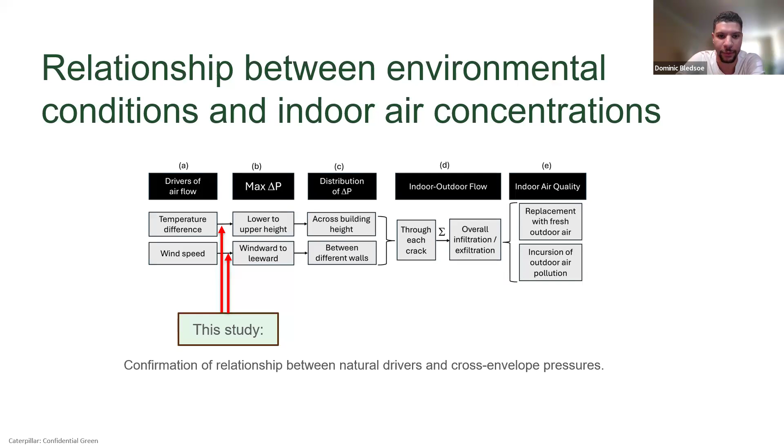So two of the foundational models this is born out of are the Lawrence Berkeley National Lab model and the Alberta infiltration model. Both have been around for a while, and they've both had a pretty significant impact on the standards put forth by ASHRAE, particularly the ventilation standards.

Basically, these models are used to understand how much air is moving in and out of the home. Based on that, if it's too low, the standard dictates that more ventilation, in terms of mechanical ventilation, needs to be installed. So it's a pretty foundational study, or two models, I should say.

Both of them also use leakage characteristics and pressures. But interestingly enough, the relationship between the weather conditions and the pressures doesn't have a ton of validation, especially in the field. There are some assumptions made based on the relationships between weather conditions at an airport, and those are then corrected to try and represent what's going on at the home.

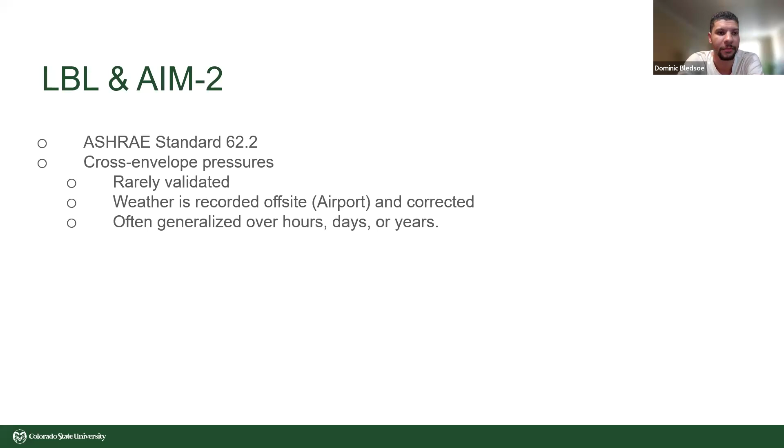So the objective of this was twofold. One is to try to validate or compare the theoretical relationships between weather and pressure. And secondly, to shrink the time scale that we're measuring at and get a better understanding of how these change with time.

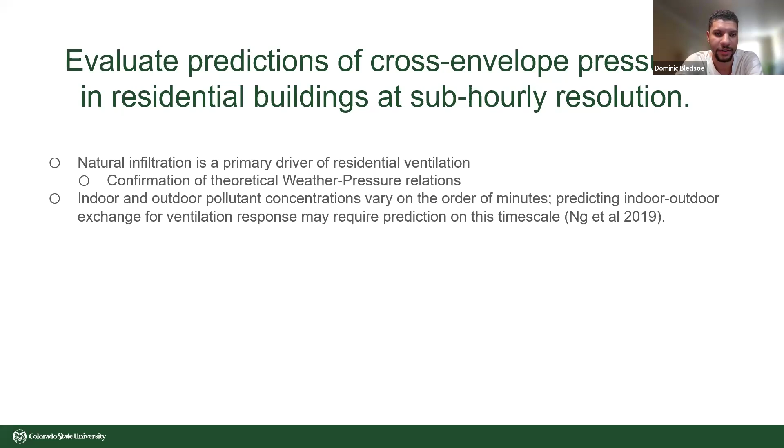So we did measurements in 8 homes, the longest of which we did for just under a year. We had various different sizes, heights, and characteristics within the home. We had some that had 2 exterior walls, some with 3 exterior walls. We wanted to get a general idea of what's going on in single family residences.

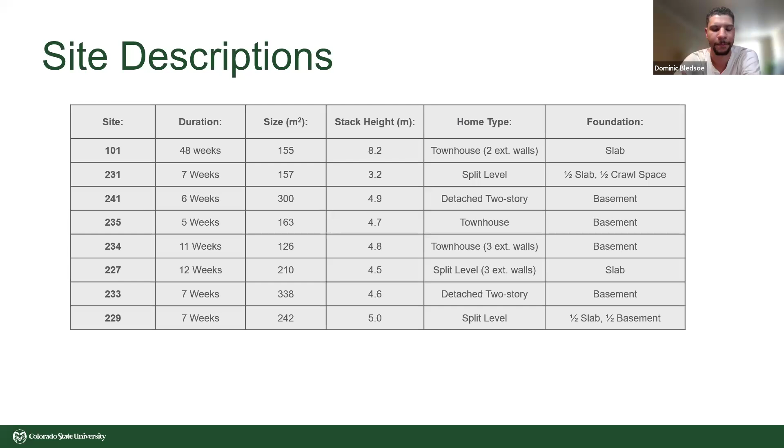So the measurements that we took: we had temperature measurements inside and out. We also had wind pressure or wind speed measurements and direction, as well as differential pressure measurements at the extremities of the home. So we had 2 at the highest point, around the roof line, and 1 at the lowest point above grade. We'll get a better understanding of why those were taken in a little bit.

But the main reason for choosing these instruments in particular was trying to get the time step we were looking at as small as possible, and trying to get a really granular view of what's going on on a minute-to-minute basis.

So these are some of the calculations that we did to understand a little bit more about the pressures that I touched on previously. This in particular had to do with the stack effect.

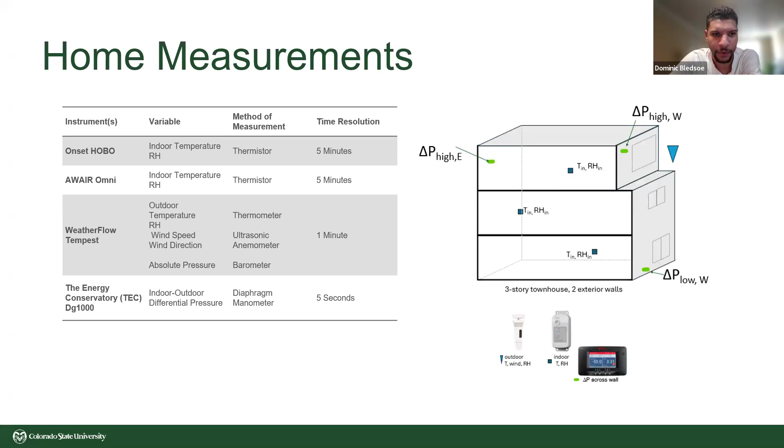We had observed and predicted stack pressure measurements. For the predicted pressures, going back to the house diagram, we have temperature measurements at each floor of the home. For each floor, based on the temperature and relative humidity, we were getting a density value, and from that we were able to calculate the floor pressure, stack pressure. By combining all of the floors together, we were able to get a representation of what that stack would be. In terms of the observed stack, we did measurements at the extremities of the home.

Hey, Tom, I'm not seeing your screen anymore. Are other people seeing it? Am I missing something? I can still see it. Okay, I don't know what's going on. I'll try to figure out what's going on with my computer. Yeah, I can see it too. Okay, fine. I'll be quiet.

So the observed pressures that we took were differential pressures at the extremities. Taking this diagram, when we have our differential pressures at the ceiling, we'll have, in reference to indoors, a positive pressure because the pressure is higher indoors. So that indoors minus outdoors will be a positive pressure.

But due to the fact that the gradient of pressure within the home is less than outdoors, we actually see at the floor a lower pressure than outdoors. In between there, we have some point, not always necessarily known, that is a neutral point. The difference, since the floor is negative, is kind of the summation of it. The summation of these pressures gives the net infiltration and exfiltration force, which is important for understanding how air is going to behave within the home.

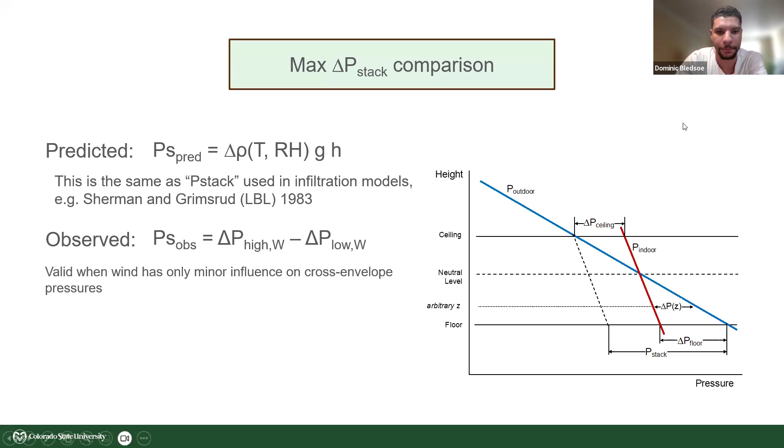The second comparison we did was predicted and observed wind pressures. To start off with the predicted, we began with just a simple dynamic pressure from our Bernoulli's equation, with the wind speed squared, rho, 1/2 rho v squared.

To try and make this a little bit more interpretable and get an understanding of the directionality of the wind, we also determined a coefficient in relation to wind direction. We broke the wind direction into 30-degree bins, and for each pressure tap that we measured at, we took a coefficient to try and understand the directional nature of the wind.

In terms of the observed pressures, we took the two highest taps because they were within a few inches vertically, and we were able to pretty successfully negate the effective stack pressures. So we wanted to see, given a wind, what is the net pressure, both negative and positive, on the home.

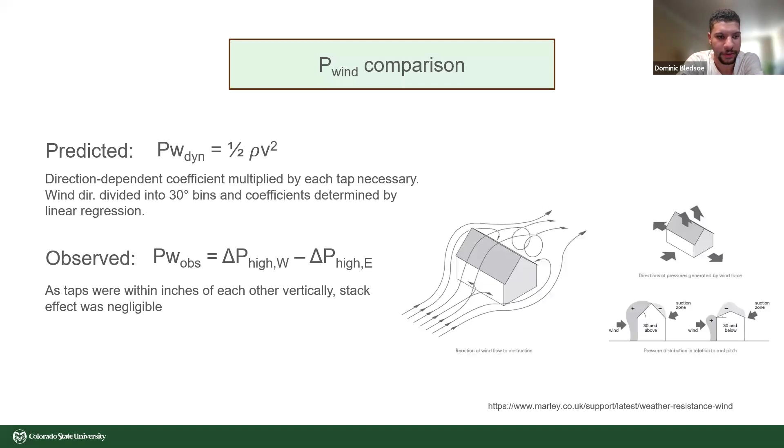And finally, the last thing we did, because the foundational models that we were looking at use wind speed correction factors for trying to understand what was going on at the site, we wanted to see, in our own example, between the sites that we measured and the local Northern Colorado Regional Airport down around Loveland, how close this correction factor could get us to what was being experienced at the site.

So what the correction factor basically does is two things. One is to try and correct for any height difference between the measurements. So we have the height of the ceiling or roof line of the house, and then we divide that by the height of the airport measurement, which I think the universal standard is 10 meters. Depending on what these next set of coefficients are, it can kind of cancel itself out.

But the second thing it is correcting for is the type of terrain that's being measured. It's a little arbitrary, but basically you try and decide which class each site, or the airport and the site, are at and make this calculation that way.

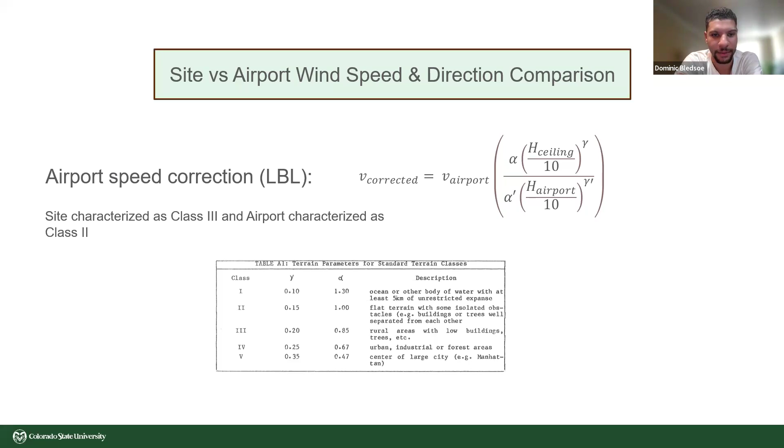So starting off with what we saw on the stack, we ended up seeing really great agreement when we were looking at low wind and heating conditions. Heating conditions, for those who don't know, is basically when the temperature indoors is greater than or equal to that of outdoors. Under these two conditions, we saw really great agreement.

I believe it was even without the heating factor, we saw generally errors around just above 10% of the total stack pressure in air. So really great agreement here.

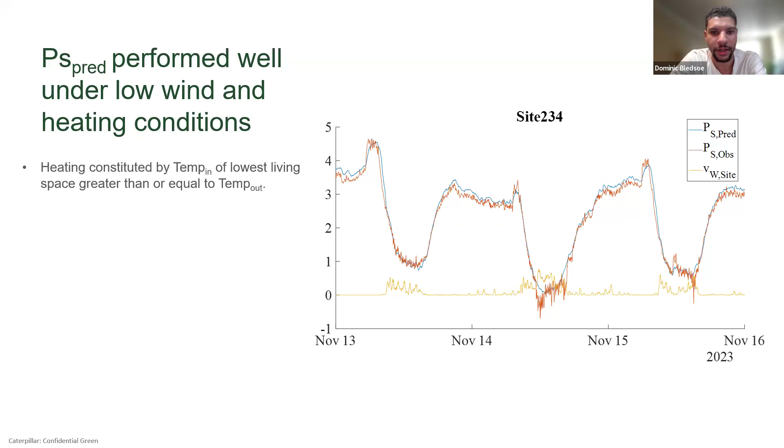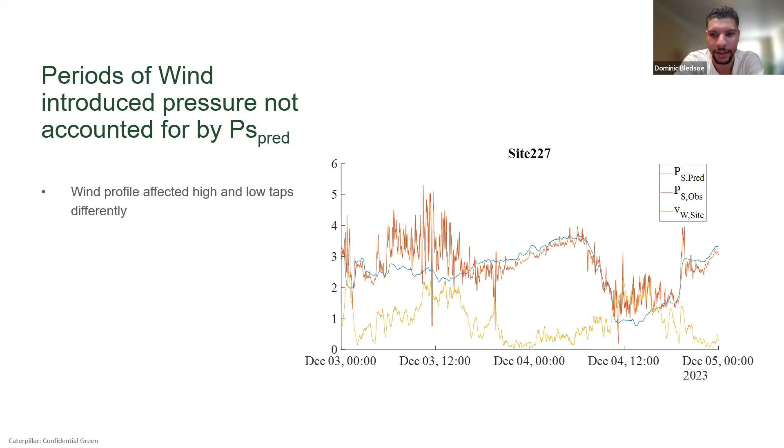Two conditions where we didn't see great agreement: when there was prevalence of wind, most likely because the incidence of wind didn't affect both the low and high tap equally. Wind is slower due to friction and obstacles lower to the ground, so it'll more often have a higher wind speed reported and higher pressurization on the top tap than the lower tap. This introduces a piece of pressure that can't be fully explained by just theoretical stack pressure. The second condition where we saw deviation was during cooling conditions.

This is opposite of heating - when indoors is cooler than outdoors, typically during summer if you're running AC or otherwise keeping your home cooler. We saw as soon as we crossed zero, some deviation from what would be expected based just on stack. We don't have a great idea what this could be due to. We corrected for stratification as much as we could given the temperature measurements at each floor, and as you can see in this figure, wind doesn't seem to be the main factor. This definitely needs more looking at, more measurements.

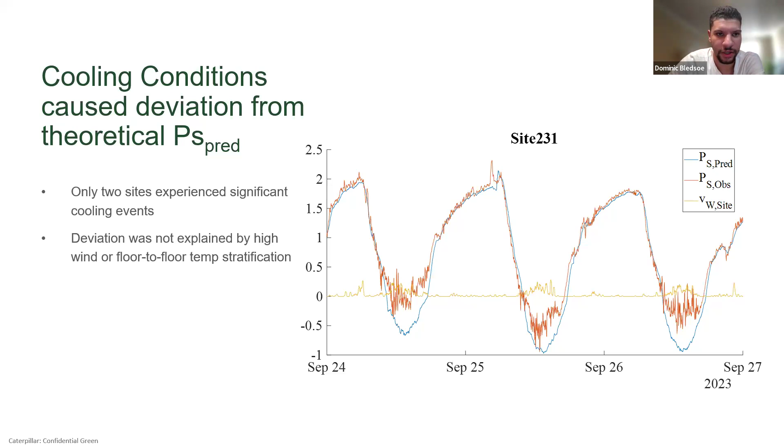So now moving on to the actual numbers. This is a lot, but basically for every site we sketched out the dates we observed over.

For the total stack pressure, I initially set it as average stack pressure, but especially for site 101, since we were looking at over a year, just taking an average of the stack doesn't give as nuanced a picture. So we took the 10th and 90th percentile of the stack pressure to get an idea of what's happening when we're getting down towards cooling, and what's the upper bounds of the most potent stack pressures.

In terms of statistics, we started with a mean absolute error calculation, which takes for each point the absolute difference between observed and predicted stack pressures. We did that for three conditions: first for all observations, second for just the low wind observations, and next to those values is the percent of observations that were low wind. Finally, both low wind and heating.

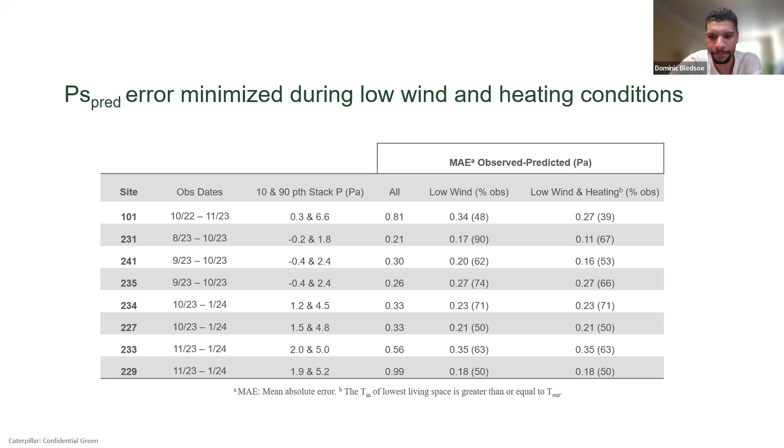So I'll move into wind predictions now. In terms of predicted and observed wind pressures, we saw not as good predictions as we did in stack, mostly due to the noisiness of the measurements, but also in terms of the magnitude of these predictions - they seemed to be under-predictive when taking our dynamic wind pressures.

We also saw at times, in multiple sites, a maintained pressurization during wind events, even though at times the wind was dropping to 0. Looking in particular just before midnight on November 24th, we see a maintained pressurization even though the wind speed seems to be dropping to 0, so our contribution of wind would be assumed to be 0.

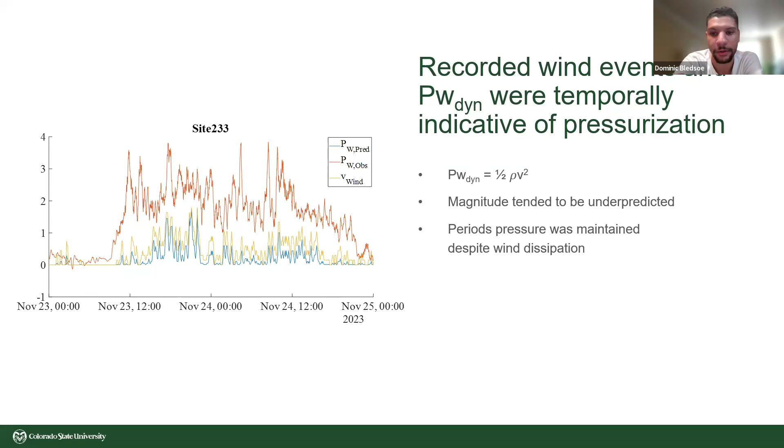In terms of trying to account for the directionality of wind, we were taking each tap and dividing the directionality into 30-degree bins, which we see on the wind direction column. For that, we took a linear regression between the pressures and the predicted one-half rho v squared estimates.

So this was kind of an extreme example. There was a table for every one of the sites, but this showed 2 of the unexpected characteristics we saw in quite a few of the other sites. The first being that even across various wind directions, we didn't see a very consistent crossover between signs, which we would expect.

If we have a direction that's directly facing the tap, we would expect that tap to be pressurized and therefore positive. But conversely, if it was on the opposite side of the building, we would expect a negative in this case. So that was one of the things that was a little interesting about these points.

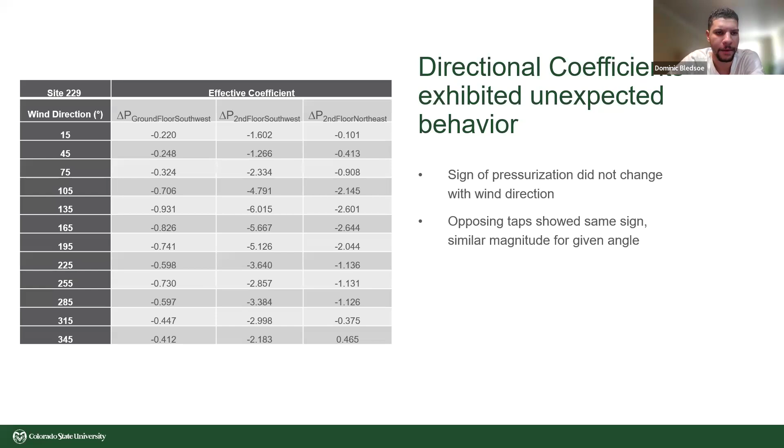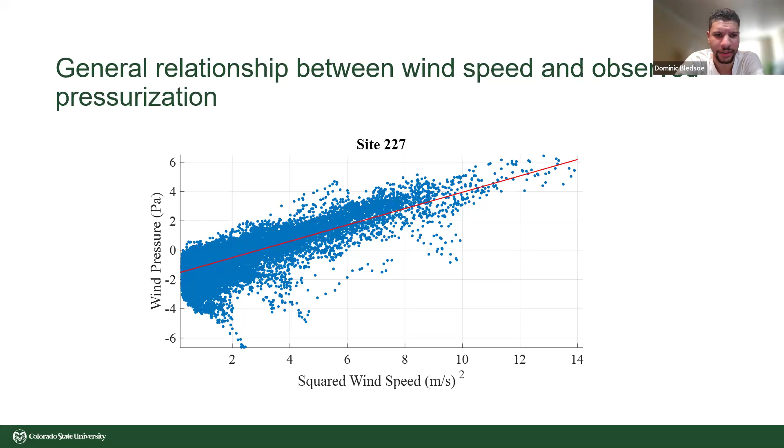So to try and get a general relationship between wind speed and observed pressurization, instead of trying to do point predictions, which because of the noisiness and inconsistent coefficients, we decided to just look at, for a given wind speed or wind speed squared, can we get an idea of what that pressurization would look like. This was an example of a good one. I think the R squared of this one was around 0.6.

It wasn't necessarily good for all of them, and I'll show an example. For some of them, especially in the sites where we didn't see a ton of high wind observations, the corresponding pressure to wind speed didn't seem to have a very linear relationship. We had some, particularly 229 and 227, that showed a decent linear relationship, but for the vast majority of the other ones, it didn't seem to really correlate.

Now I want to look at the relationship between site weather conditions and airport weather conditions. Like we said before, a lot of the preeminent models use corrections for airport wind speed. So we wanted to see how well airport wind speed represents conditions that we're seeing at the site.

The first thing we notice right off the bat is the granularity of the data is a lot different. Airports generally measure around hourly, once an hour measurements, which is very different from the 1 or 5 minute measurements that we were taking at our site.

Secondly, the magnitude is pretty significantly different, especially at the highest peaks of wind events. We're seeing somewhere around 5 times greater wind speeds, likely due mostly to the difference in height. But we'll touch on that correction and see if it makes a difference in a second.

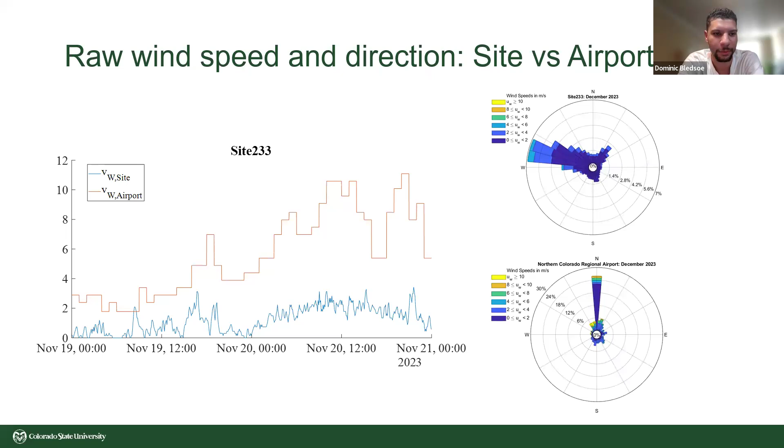Part of this is, when looking at those correction factors, the ability of the correction factor to do its job really depends on the person choosing the right classification for what each site is. There are 5 classifications, ranging from open ocean with no obstacles within 5 kilometers or 3 miles or so, to classification 5, like the middle of Manhattan or a very urban area with lots of skyscrapers and obstacles. I think part of what this shows is, one, it doesn't do an amazing job in and of itself, and secondly, the arbitrariness of deciding those classifications makes it not necessarily ideal for making assumptions about the conditions on site.

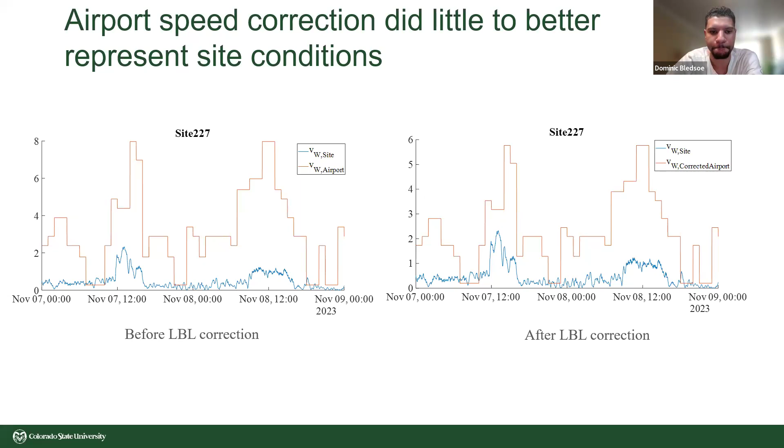So kind of to clean up here, we saw within stack pressure excellent agreement, particularly under low wind and heating conditions. For both low wind and heating, we saw around 10% error or less for most sites.

In terms of wind events, one of the things we are able to say is that when we were recording wind signals, it was an excellent indication that pressurization was going to be happening on the house. In terms of the actual relationship between pressures and wind speed, we had mixed results in the scatter plots we talked about earlier. And in terms of point predictions, just because of noise and coefficients that didn't necessarily line up with expectations, they didn't seem reliable to make point by point predictions and MAE values like we did with stack.

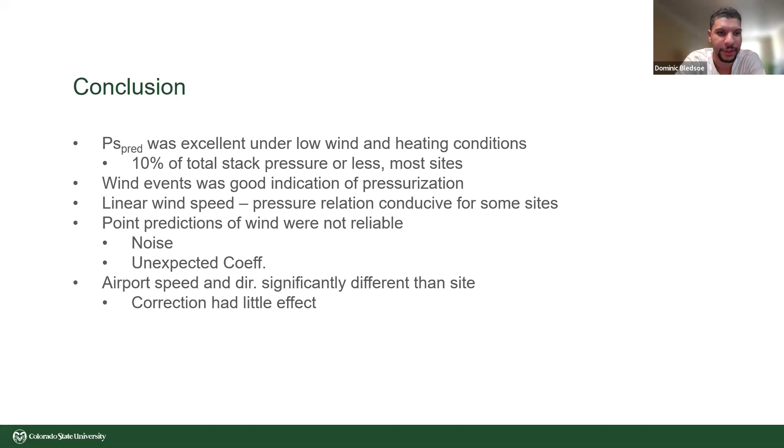And then airport speed was significantly different in both granularity and magnitude. Even with the correction, it was still roughly 3 times greater than what we were witnessing on site.

So I'll wrap up a little bit with what this adds to the air quality field. One, going back to the objectives, was trying to get a high resolution prediction, both to better understand the dynamics of airflow on that timescale, and also for the potential to actively manage the way that air is moving in and around the house. And finally, the further and more in-depth validation or comparison of theoretical relations between weather and pressure.

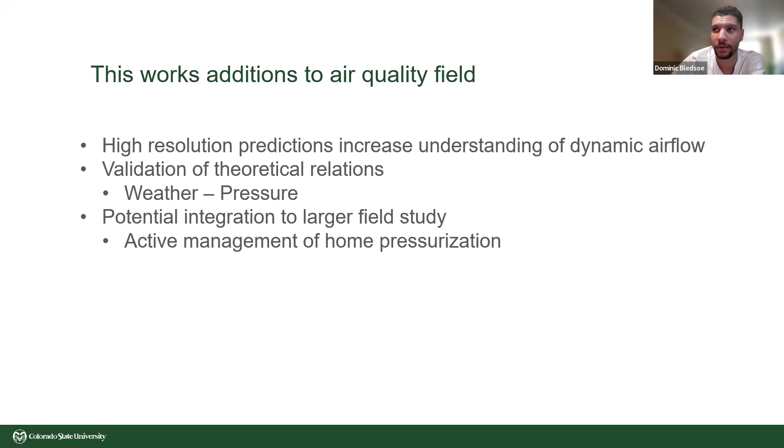All right, so I will look at chat now. If anyone wants to chime up, feel free. It's 27 minutes. Okay, well, there's more to add anyway.

I know there were some R-squared values I want to throw in there, and some wind speed cutoff I didn't go into, so those are at least a few minutes. I have a lot of time to work with Dom offline, so I'd like to spend the rest of the time getting thoughts from people. And Dom, I think you'll find that people don't understand different things sometimes, and they're interesting and useful in preparing for an audience. So everyone go ahead and ask your questions. And Dom, you probably saw that Ellison has questions in the chat. I am taking notes, and I will be saving the chat, so you don't have to do that.

Perfect, so I'll start with Ellison. General question: what sort of data cleaning do you do for these site data sets? So in terms of data cleaning, we did. There were kind of two main ones coming to mind now.

One was smoothing it a lot, especially with both the stack and wind observed pressures. There's a lot of sporadic nature in the data, so we used about 15 minutes of smoothing for each, especially for visual representations and getting an idea of what's going on. The other thing was there were times where measurement tools cut out or had flat lines that were kind of unexplainable.

I had a question—I forget what the axes were, but when you were predicting and showed a scatter plot with that red line, you said maybe the R squared was around 0.6, and that was wind pressure versus wind speed. So do you have any insight into why some of the sites had a better R squared than others? Were there differences?

I don't have a perfect understanding of it. I do think, because this doesn't necessarily take into account directionality—since our taps are static—depending on where the wind is coming from, for a given wind speed recorded by the weather station, there might be different pressures observed by those manometers. Other than that, there's also the possibility of other effects, namely mechanical ventilation, which could coincide with a wind speed above the threshold of 0.5 meters per second.

It then kind of gets conflated. I think those are the only two that I can really think of that would be kind of misconstruing these in this relationship.

So, because we're all friends here, Dom, I'll let you go next, Naomi. Dom, you don't ever want to give an answer that just undermines your entire analysis, which you just did. Be careful. And I think you're punting, but you just killed everything. We've looked at mechanical ventilation, right? And we know that it should cancel out in a lot of cases. So you don't want to give reviewers or an audience a chance to go after your blood.